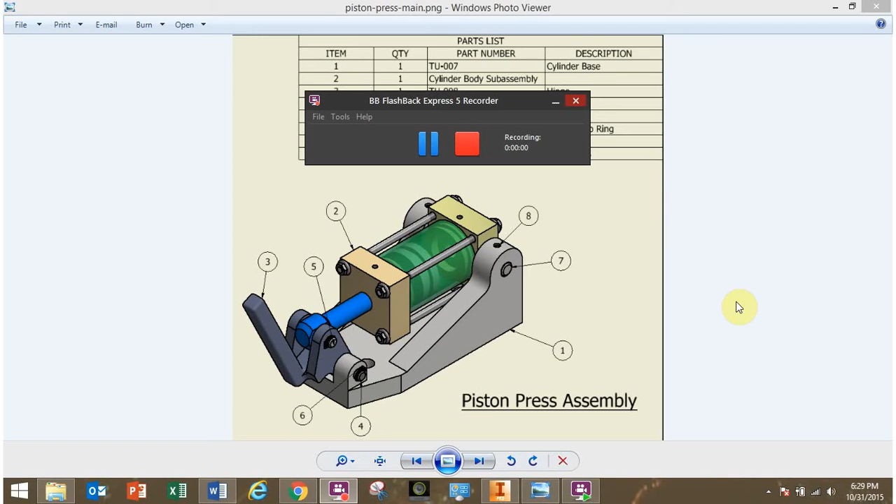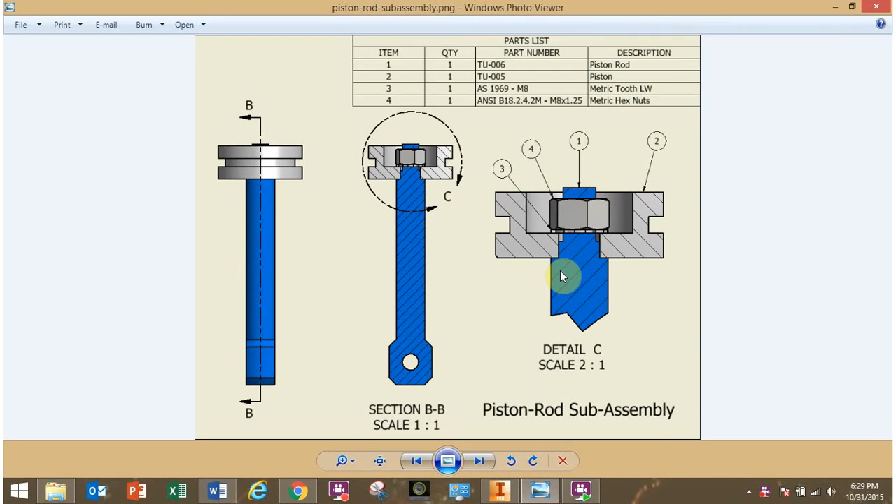So just to review, we've looked at these different drawings and asked which of these sub-assemblies or assemblies do I want to create first. We reasoned that we wanted to start with the lowest assembly that was only made from parts, with no sub-assemblies inside it. We made this one first, and we've also created this sub-assembly as well. Now we have everything we need to make this piston press assembly. Again, this is a bottom-up methodology where you make all the parts or sub-assemblies, and then finally put them all together.

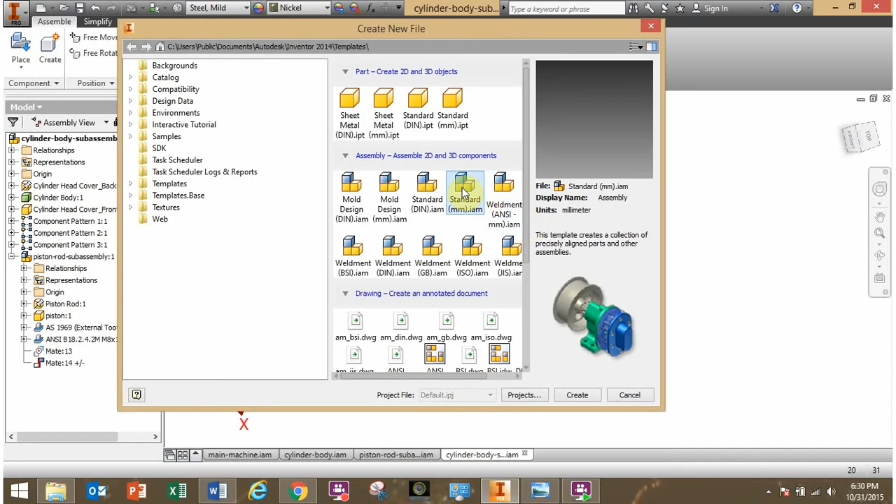Okay, go to File, New, and we're going to make a new assembly. This will be the main final assembly, so I want a standard millimeter assembly. Create that, and let's save it. First thing we'll do, I'll just call this one the main piston press assembly, and hit save there.

So what's the first part that you would want to place? Again, you would want your first part to normally be something that's kind of a base or a grounded part, something that will be fixed, and that's obviously this part here. You have a nice frame that everything else is mounted to. That's called the cylinder base. Let's let that be the first part.

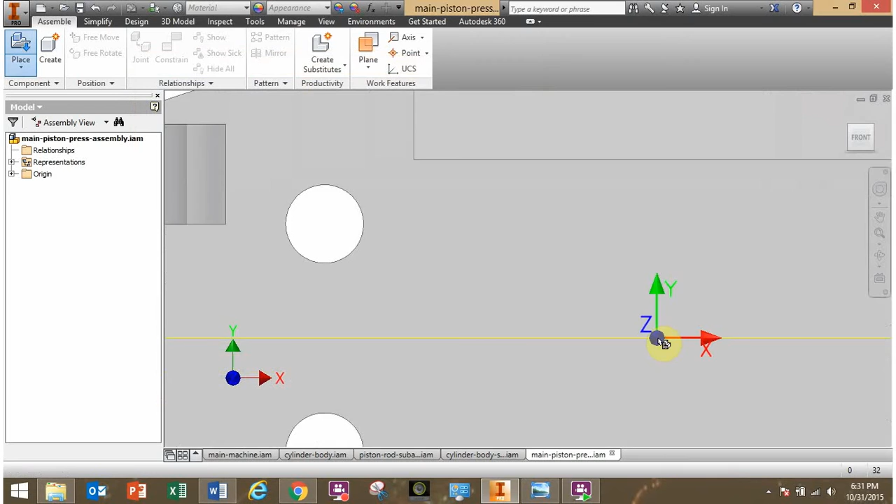So go to Place and find the cylinder base and hit Open. I'll zoom out again. Right click, hit Grounded at Origin. That's always a good idea for the first part, so the origin of the assembly matches the origin of the main part. All right, so we've got that.

Now let's start adding in some other things. So what would be the next part, you think? Well, we have several options here. I could add this handle in right here, number 3, the hinge is what it's called. I could also add this other sub-assembly. Let's actually do that - let's add this cylinder body sub-assembly.

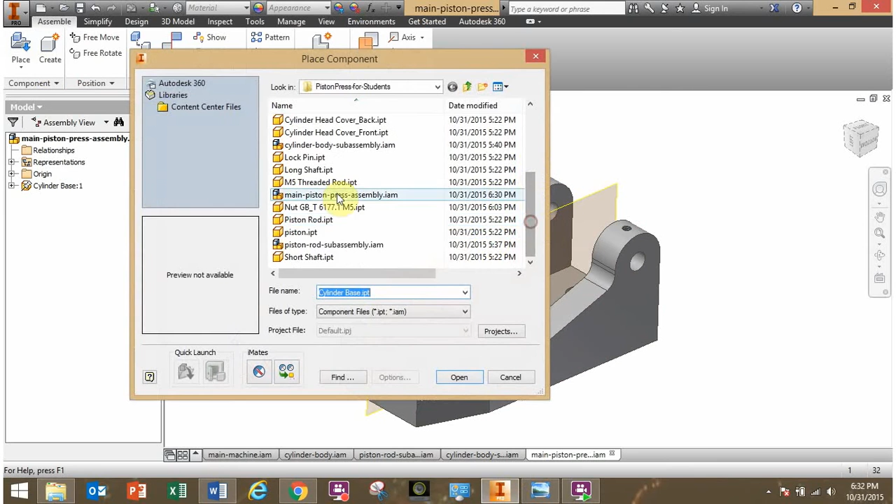Let's go find it. Go to Place, and go to this sub-assembly you've created now, the cylinder body sub-assembly. Hit OK, there it is. Click once and hit Escape. We've got it in here.

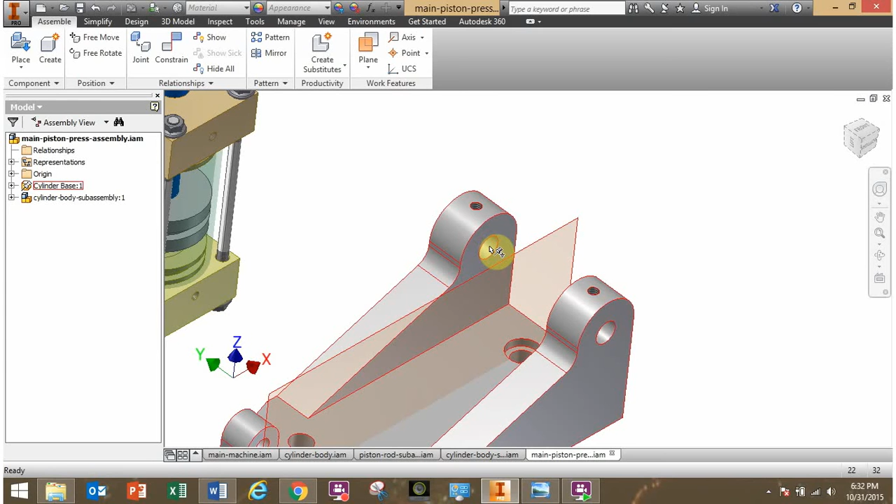So you see these holes here, that hole, and there should be one on the flip side - yeah, this hole here. Those will align with these holes right here. Alright, so let's go to constrain. Let's make sure that axis fits with this axis. Hit OK, there it is.

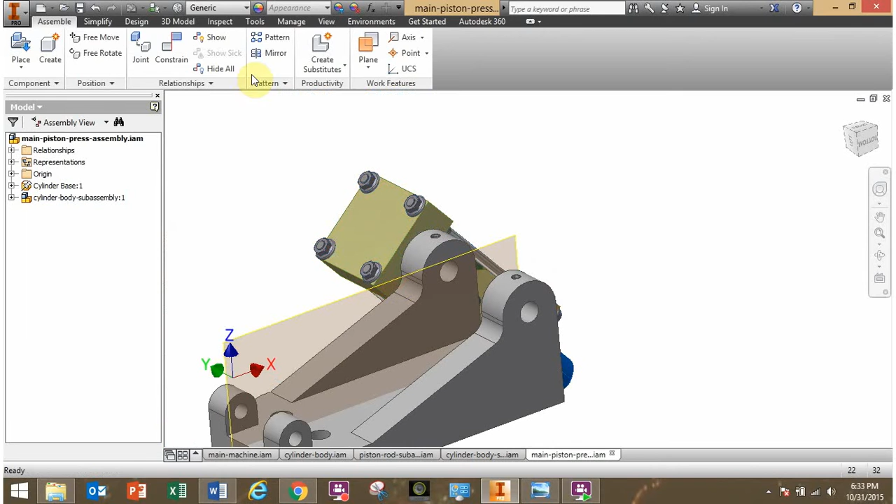Now, again, let's refresh on the degrees of freedom. Let's go back here to View, select degrees of freedom, and you can see there's 2 degrees of freedom. There's one green arrow and one green rotation vector. That means I can rotate it and I can slide it in and out - those are the 2 degrees of freedom.

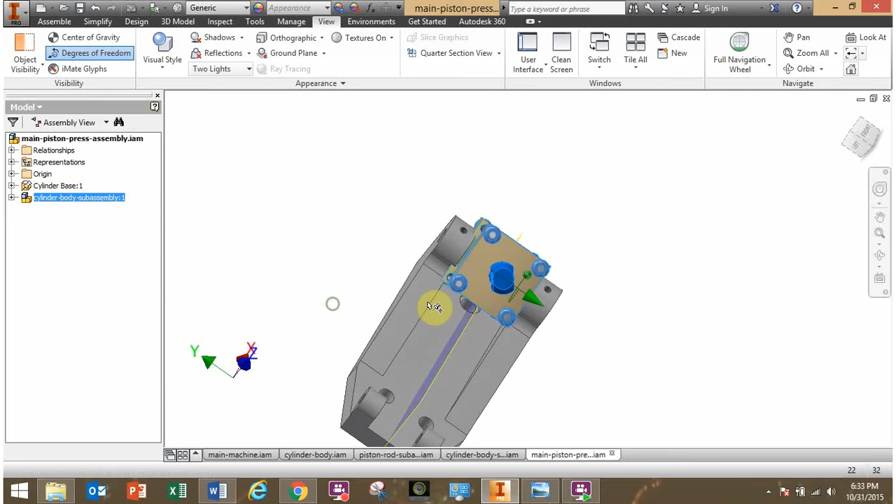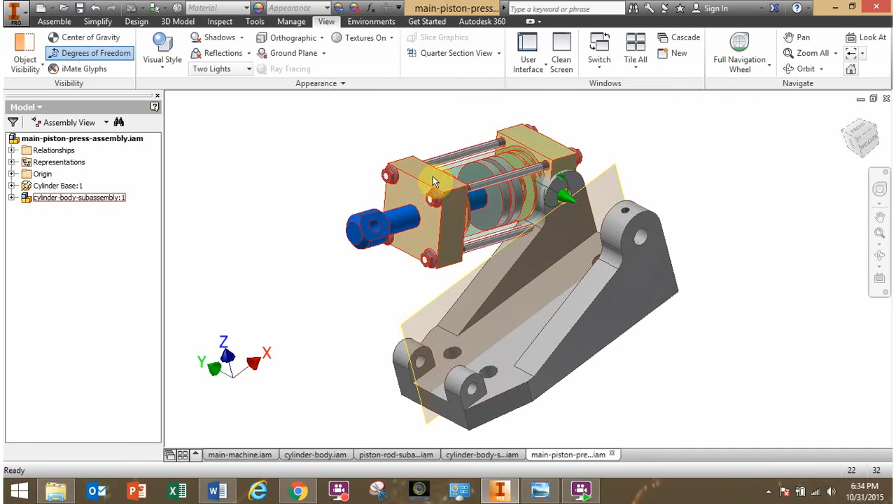Well, how about restricting this so it can't move left or right? How far, or where do I want to restrict it? Well, I want it to be right in the middle. Again, you remember how we do that? That's with planes now - I don't want to do it with a face, I want to find a mid-plane. This mid-plane should already be turned on for you. So I want to constrain this mid-plane right here with a mid-plane on this sub-assembly.

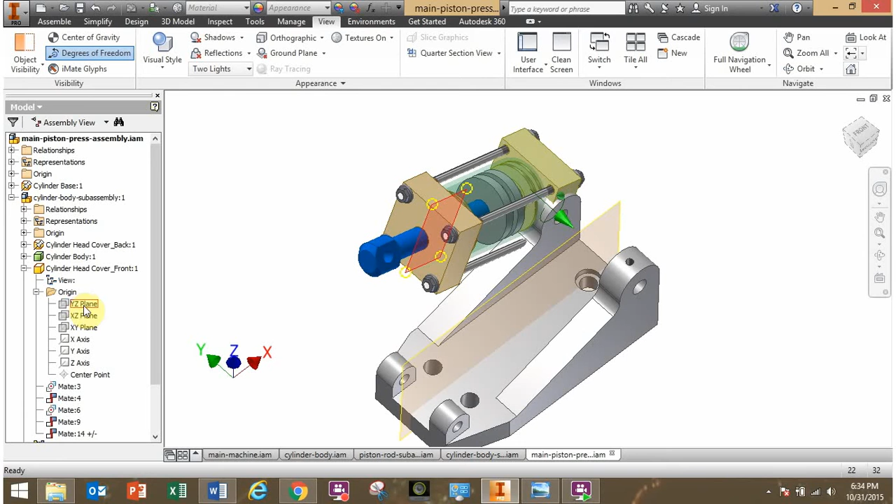All right, so let's find a mid-plane on this sub-assembly. Expand that, and I'm going to look at one of these front covers, either the front cover or the back cover. Let's look at this front cover - expand under the origin. You see that plane right there? Not this one, not this one - select the YZ plane. I want to constrain, I'll just turn it visible. I want that plane to match up with the middle plane of the cylinder base that I've put in.

All right, so go back to constrain. Now notice one thing before I add this constraint - you see this green arrow right here for the degrees of freedom.

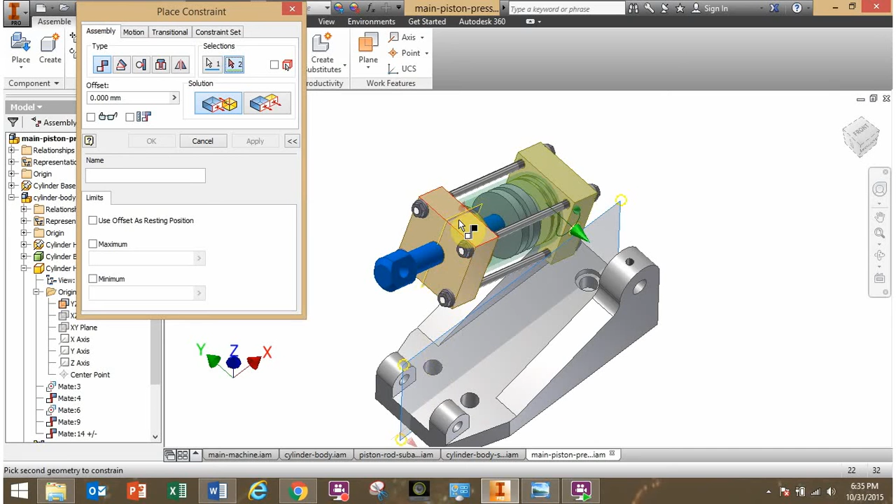That says it's free to move left to right like this. After this constraint, that green arrow will go away, and it will only be able to rotate. So I want to constrain this plane, select that plane with this plane. Hit OK. Now notice what happened to the degrees of freedom. It's a red rotation vector there. The green translation vector went away. So the only thing I can do now is rotate this.

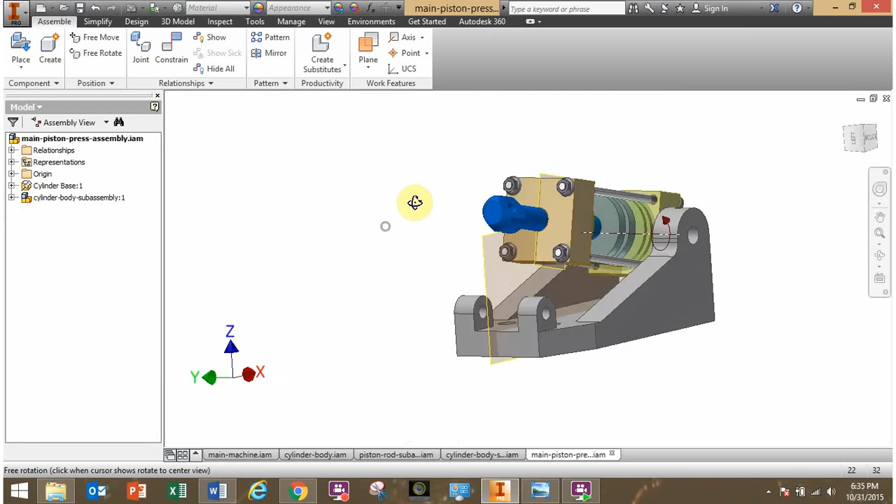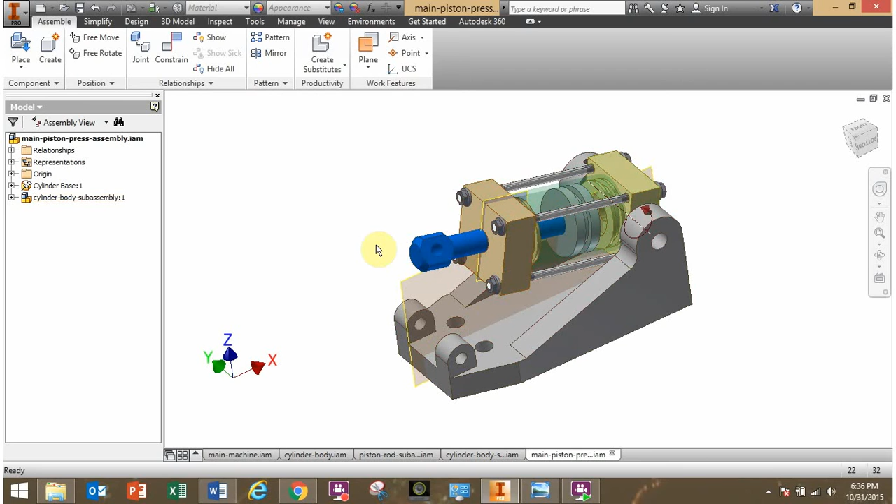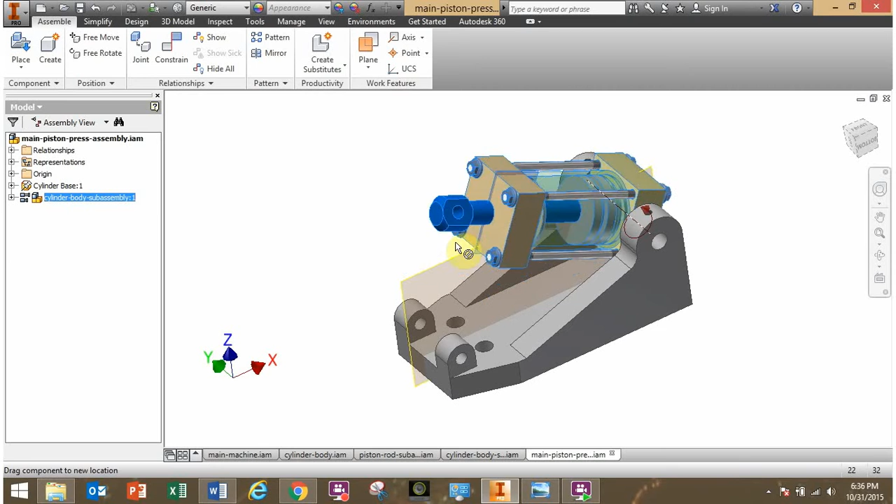Now, before you move any further, I want to show another thing here. Notice if I try to click on the piston rod and move it, you can't do it. But you do want it to move. I want this piston rod to move in and out. By default, when you place a subassembly within an assembly, it locks that subassembly, and we don't want that. So if I right-click on the subassembly for the cylinder body, come down here to flexible. When I click on flexible, you see these little icons pop up on it now. This allows the piston rod to drag in and out, just like I've already previously constrained it when I made that subassembly. So again, I'd make that flexible.

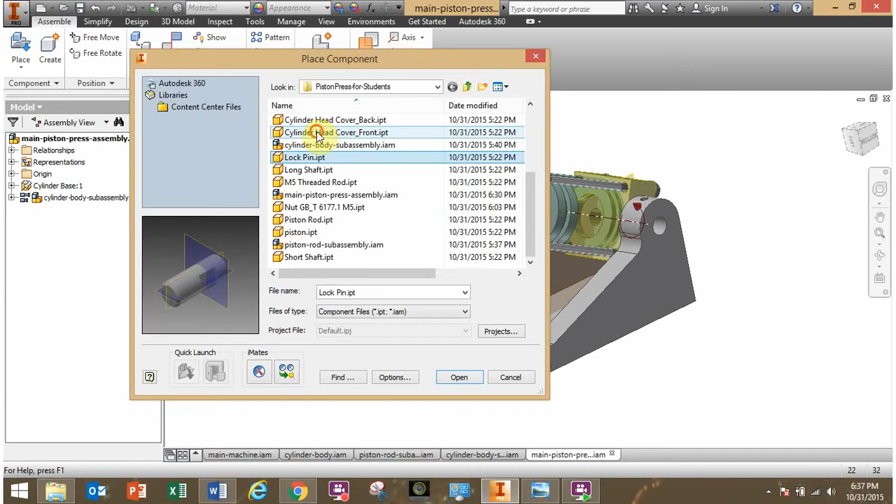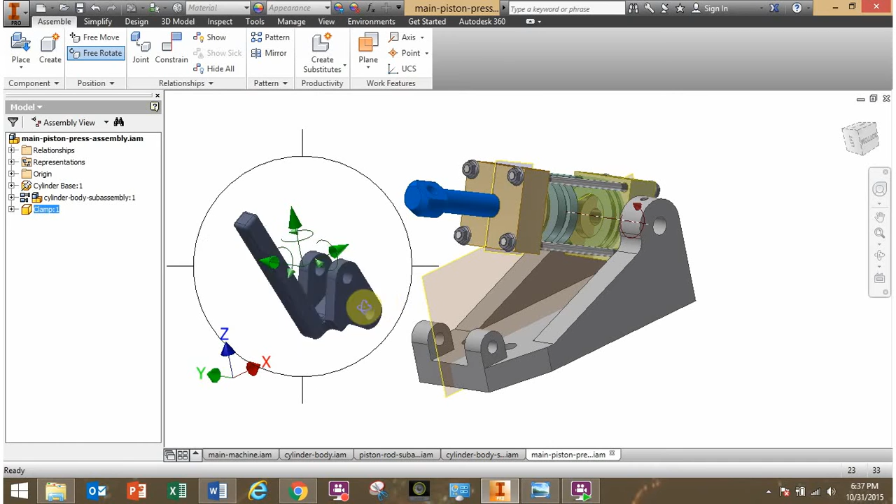Notice the degrees of freedom. I'm able to move it any way that I want. Again, I will click on the rotate, and let's rotate this to approximately the position that I'll place it. Now I'm going to add a constraint, and let's make this fit in here. Click OK. Notice most of the degrees of freedom went away except for two. Now I can slide it and rotate it like this.

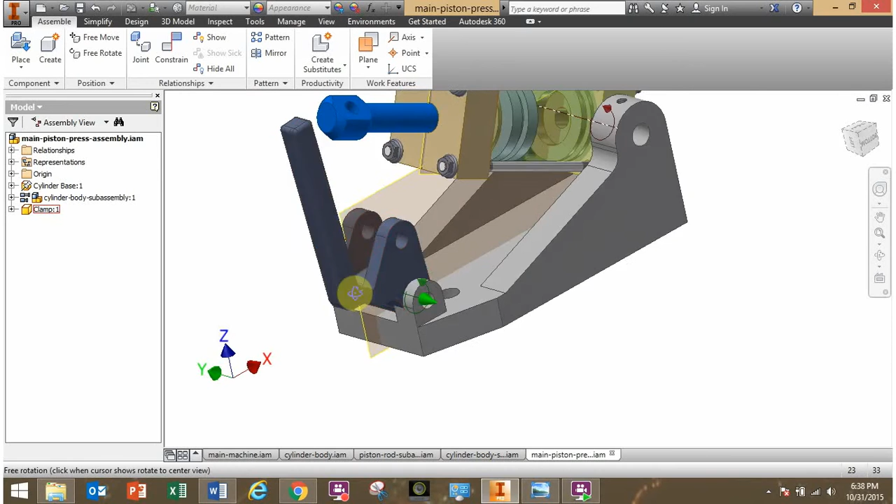Now what's another logical constraint? Well, I could say, hey, let's make this thing be in the very middle, which is true, but if I constrain it to fit with this, I may not have to do that. Let's look at that. Let's add a next constraint, and let's say I want that axis to be centered with this axis now. Hit OK. So now those are constrained. I can still slide it left or right though. So again, how do we fix this?

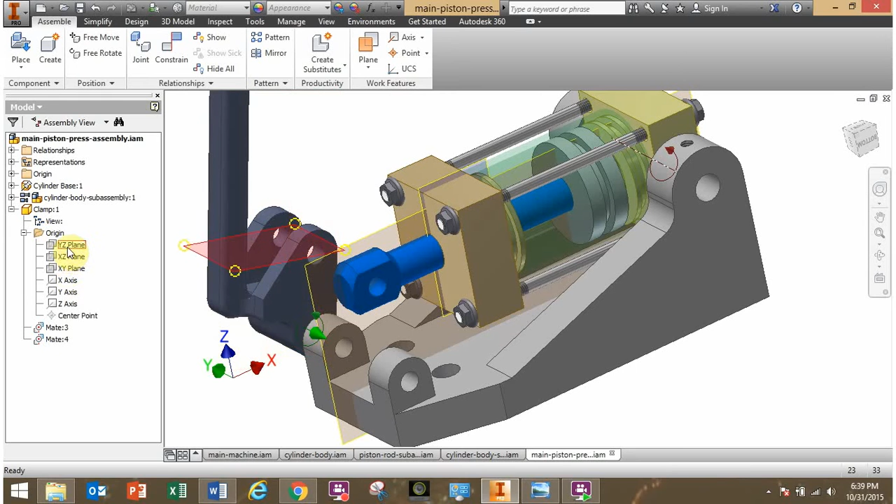Well, let's go find a middle plane of this handle. It's called the clamp here. So expand the clamp, let's look under the origin. Not that one, not that one. There's one, let's make that visible. Notice it goes right through the middle there. I can click on constrain, click on this plane, and then the center plane for the base here, click on that. Well, look what happened.

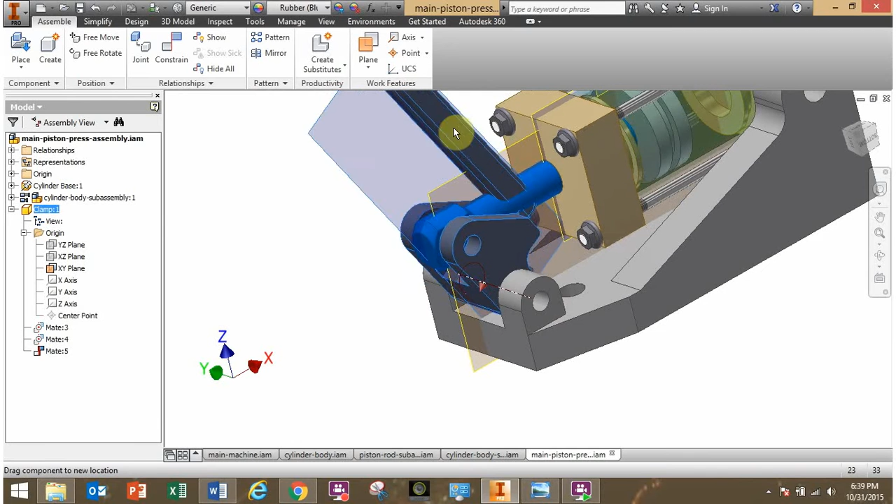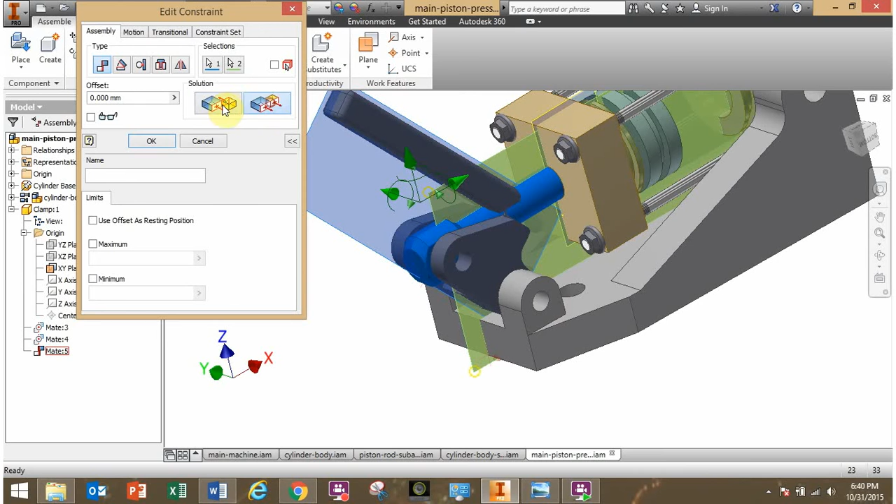It actually flipped it around the wrong direction. Why did it do that? Well, let's go back to this mate, the last constraint that I just added. I'm going to right-click and edit that. Now, you see under solution here, there's in this picture two red arrows, which are normal vectors to the faces or the planes. They're opposing each other, they're opposite. In this one, they're the same direction. So depending on clicking this, it will flip the two planes. So if I click on that one...

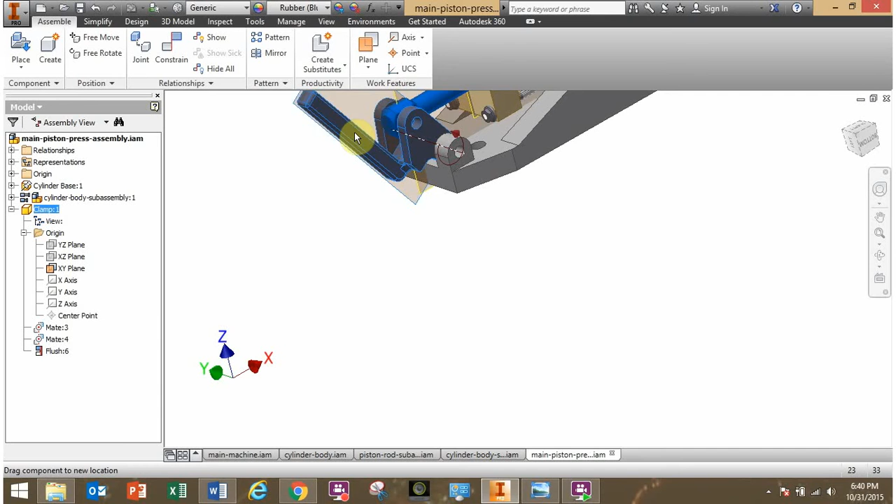Now let's rotate it back up here. There we go, sorry, trying to get the rotation going. Rotate it up, having a hard time. There it is, sorry, I was having a hard time rotating it. Okay, now when I flip the orientation, it actually flipped it in the correct location now. Let's see that again. Again, I can right-click on this constraint, the last one I added between those two planes. Right-click, hit edit that.

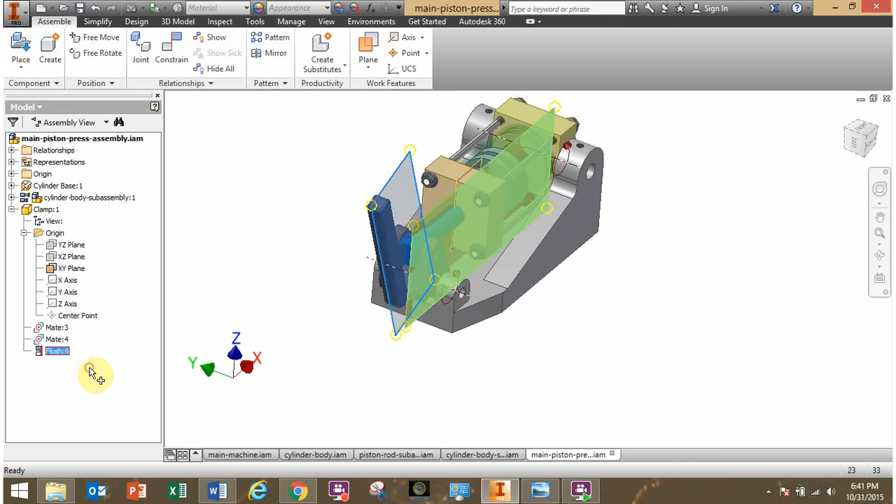So if the solution is this one, I click OK, it flips it around. Okay, that's not what I want to do. Let's edit that. Let's just flip it back to the flush. Okay. There we go. All right.

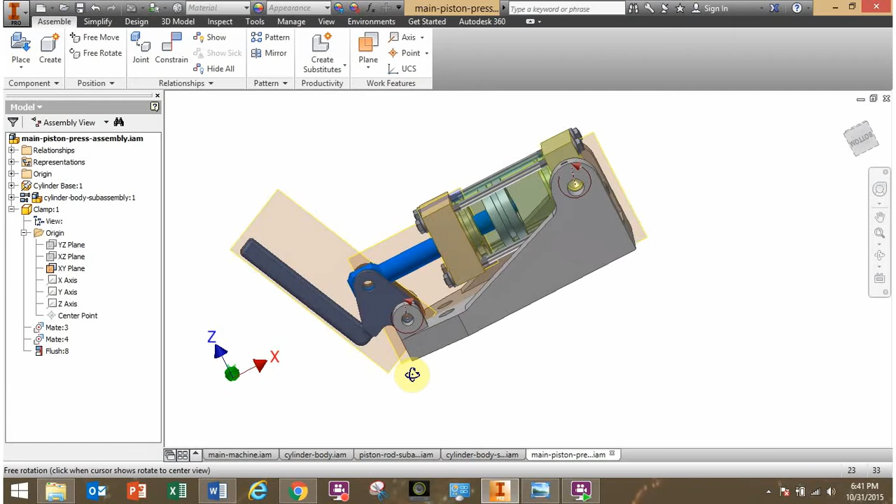So you can see we've already got the motion constraint here, and notice I can't move it further than this or further this way because of the limit that I applied when I made the limit for this cylinder on the cylinder body subassembly here.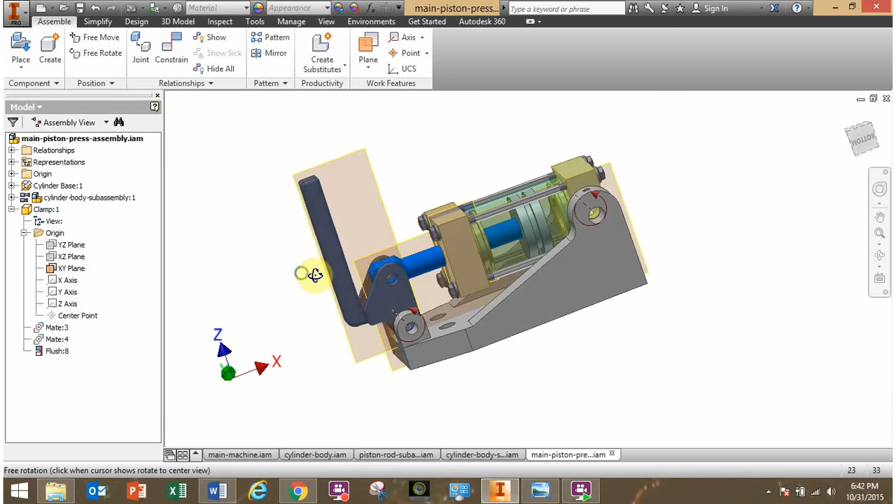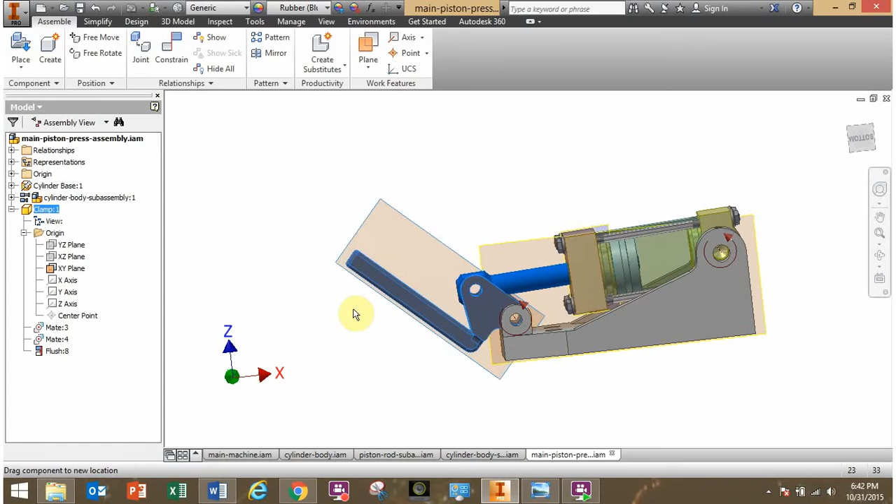That's very nice. Now, let's say if I only wanted the stroke to go between here or here. This may be important for you to know how to do on a quiz, to know how to limit an angle constraint. So if I wanted to add limits to say, let's make this handle only go from this position to this position here. Let's say one that's vertical to 30 degrees from vertical, so I only want the handle to limit to this type of motion here. I don't want it to go here or here, just a small limit. So that's adding a limit to an angle constraint.

All right, I'm going to turn this plane off, turn the visibility off. So that would be adding a constraint. Now, what type of a constraint? Every constraint that we've added now has been a normal mate constraint here. You can see these different types, all right.

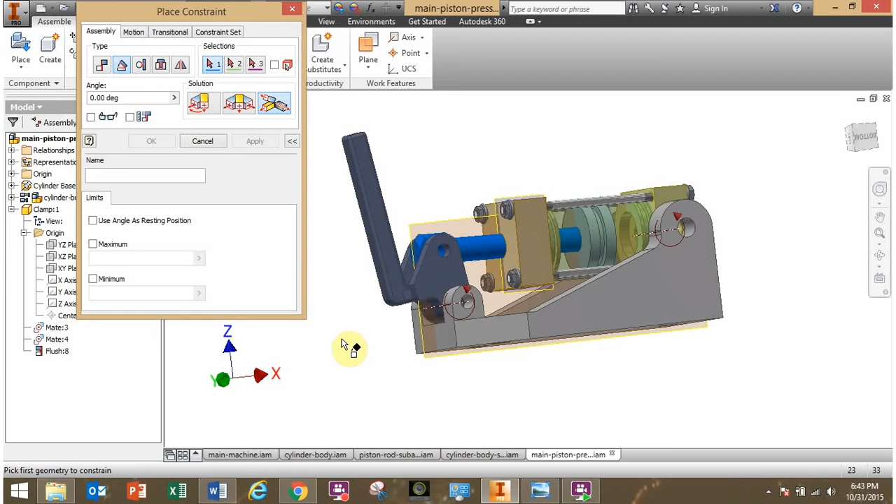This time I'm going to actually add an angle constraint here. So select on angle, and by default it selects this third one here, it's an explicit reference vector. So the first one, I'm going to say I want this face here, I'm going to define an angle between that face and, let's say, this flat face here.

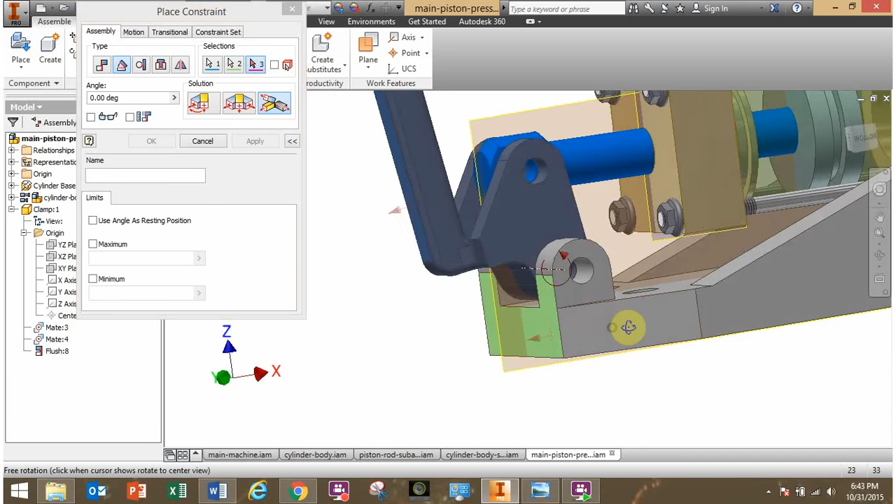Now the reference vector, which is this black one, that one should be perpendicular to both of those. So that needs to be going this way on this, but no, sorry, that face is angled. How about this face? That face right there, the one that's now turned purple, the normal vector to that face is perpendicular to both this vector and this vector here as well. So I could add some degree here.

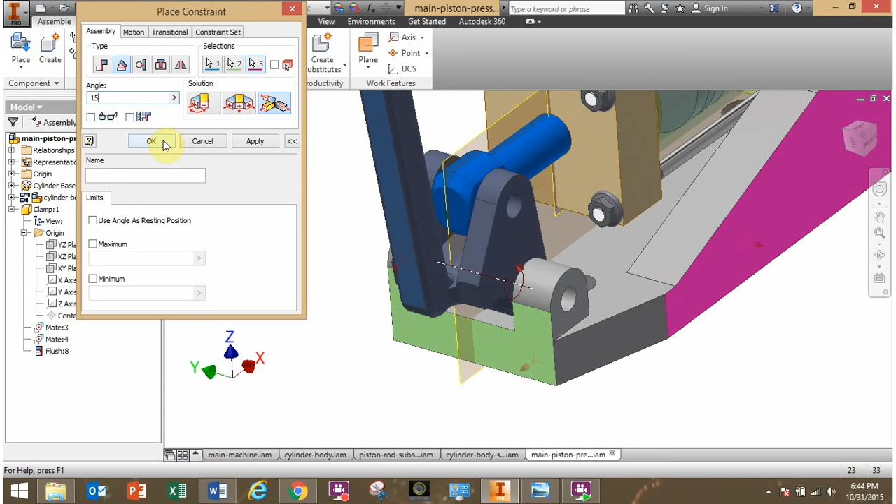If I made it 0, what if I made it 15? Is it going to give me a preview? I hope it would. Let's say if I make it 15, what does it do? Now I'm going to edit that. Let's make it about 0 degrees. Yeah, it makes that vertical now.

What if I make it, I can go back the other way, let's say make it -30, and it just goes this way, -30 degrees. I can continue this process, maybe -45, maybe make it 20, it goes back the other way. So I'm adding these angle constraints, okay.

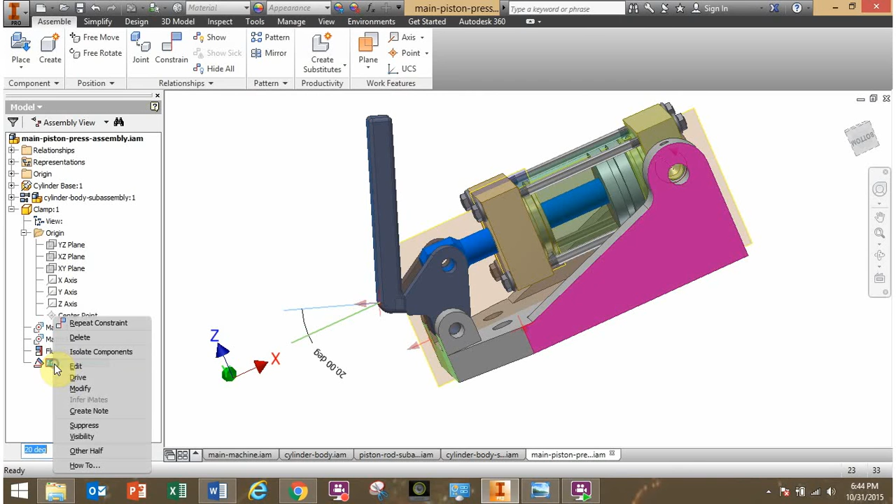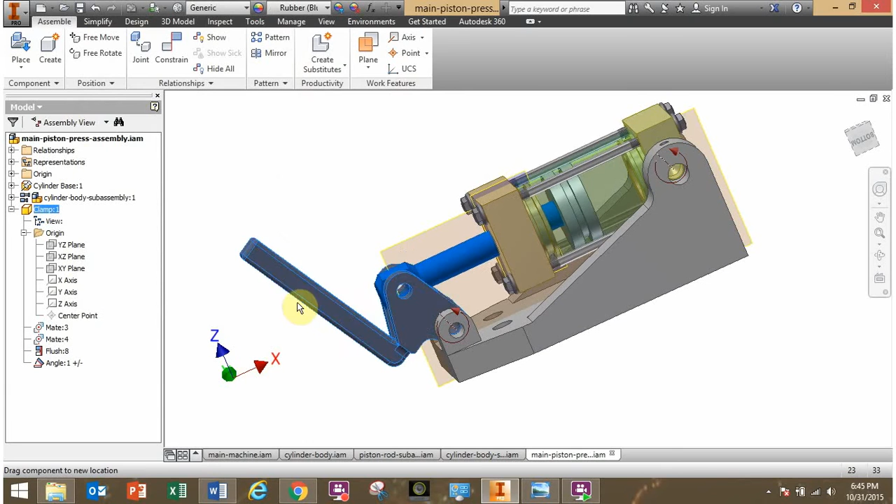But with this, I actually want to add limits to that. So let's right click on that and click on edit. Again, I want to use limits. The minimum here, make that -30, and the maximum, let's make it 0. And now I hit OK. You can see I've added, now if you click and try to drag this, I can't move it any further than 0 degrees, and I can't move it any further in this way than -30 degrees. So I've applied limits to this angle constraint here.

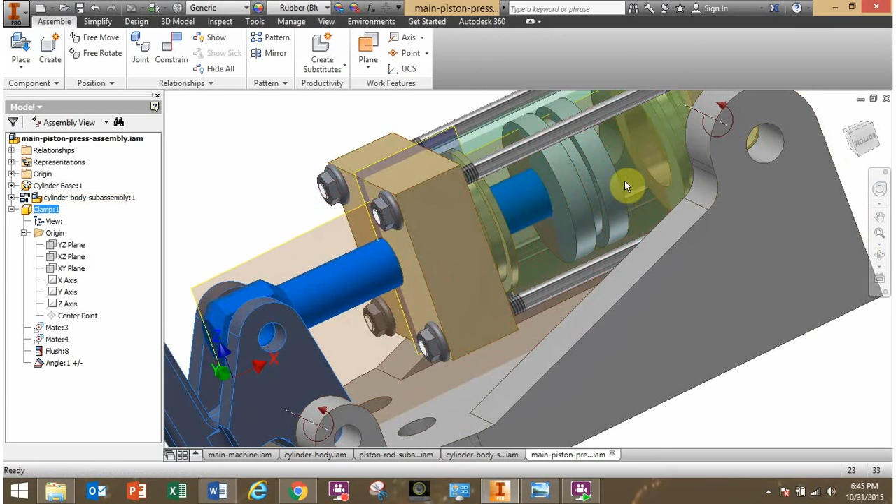Notice now this limit on the angle constraint prevents this piston from actually contacting, or it prevents the piston from going to its maximum or minimum position. That may be important for you to know how to do on a quiz there.

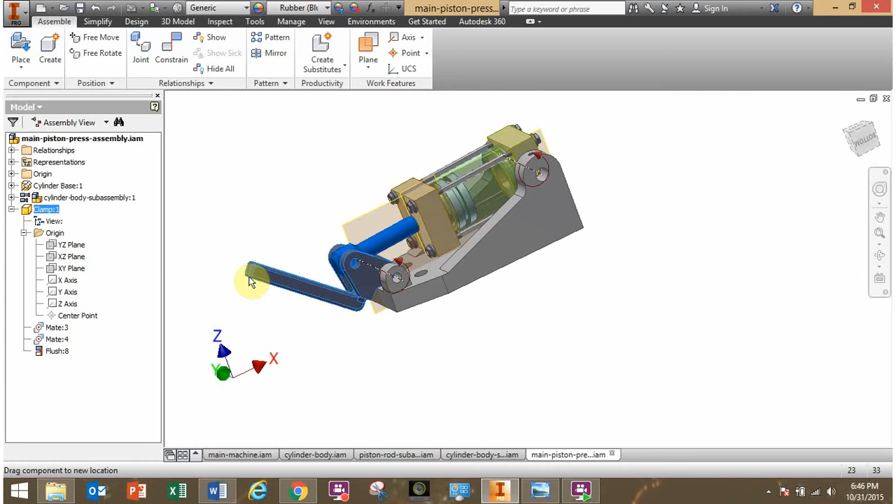I'm actually going to delete that angle constraint now. So now the constraint is again limited by the motion of the piston where it contacts here and here.

All right, so what else do we need to do? Let's go look here. Yeah, the last thing we need to do is, we've got the subassembly, we've got the main base, I've got this clamp or that handle, let's say. The last thing is just to add these pins, which would actually hold everything together in reality. That's not too bad to do. I'll just go through that very quickly now.

All right, let's first add, this may be the most complex one, these short pins here. Number 7, that's a lock pin. Okay, so let's go get one of those.

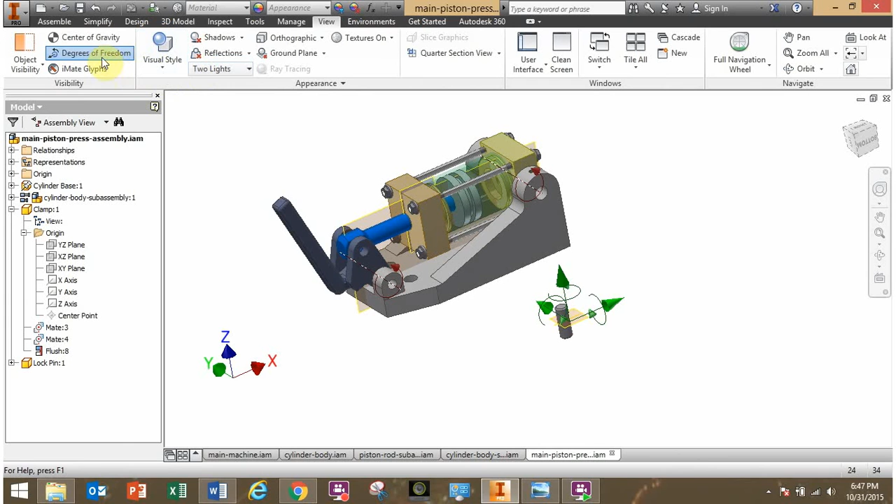Let's go to Place and find a lock pin. There it is, hit OK. Place one. I'm going to turn off the degrees of freedom so it's not looking at so much.

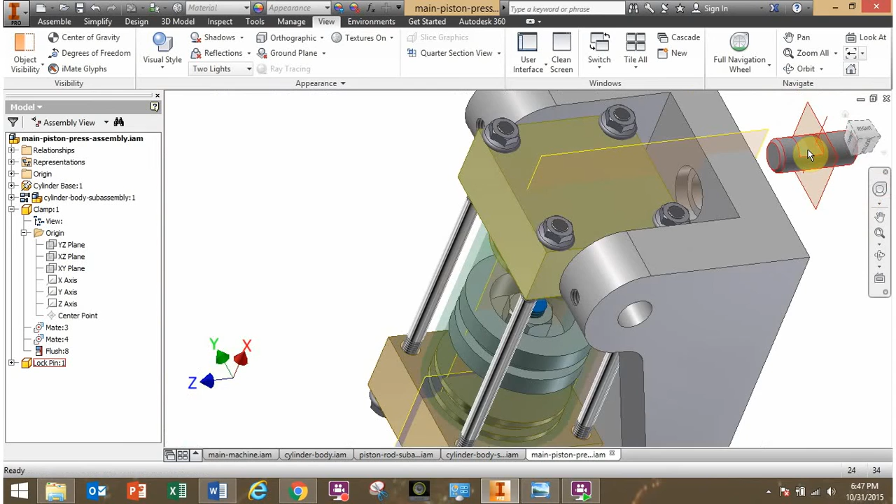Now I want this pin. Let's zoom in and look at it here. You can see there's a flat piece right here on this pin. The purpose of that is so I can put a screw through this hole that will screw down on that flat piece and keep that pin from sliding out of this hole.

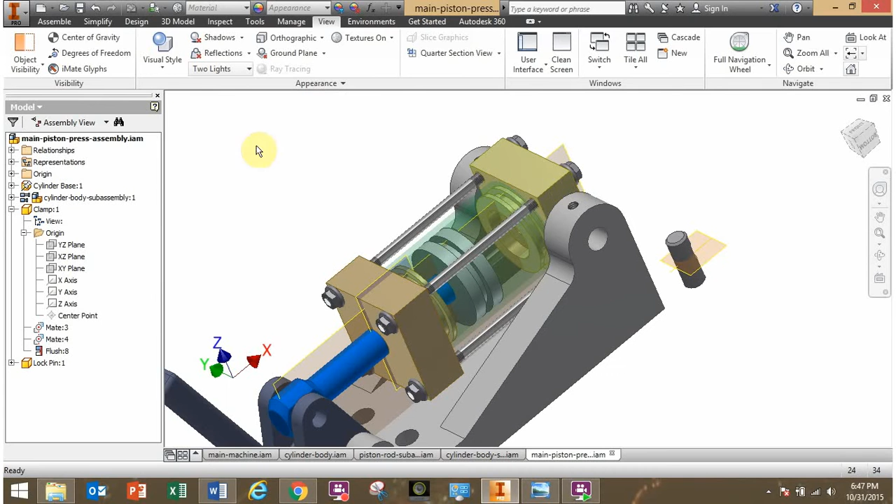Let's look back at our picture. Look at part number 8 here, the 6mm SHCS. That's actually a little lock screw. Let's go find that. Go to Assemble, hit Place. Here's the 6mm SHCS. Hit OK, place that.

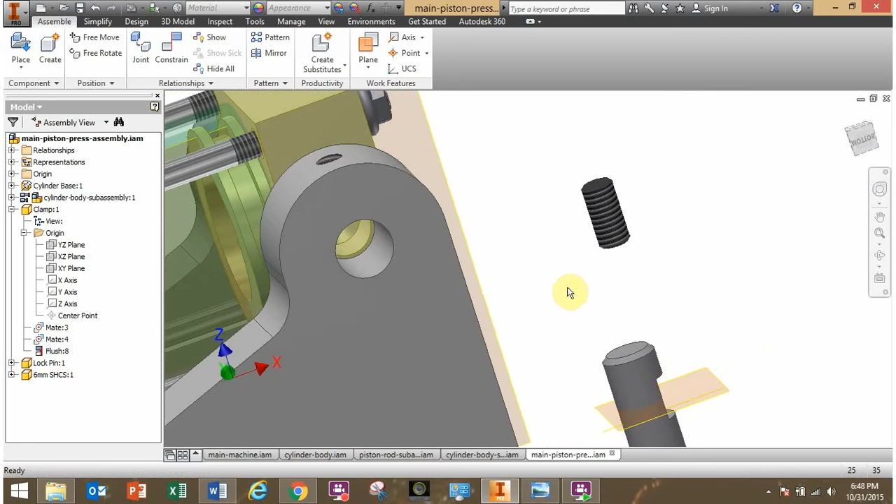Now let's look at this part that I placed. One end is flat. The other end, rotate around, has a little hexagon hole in it right there. That's where you would put the little Allen key or wrench to actually screw it in.

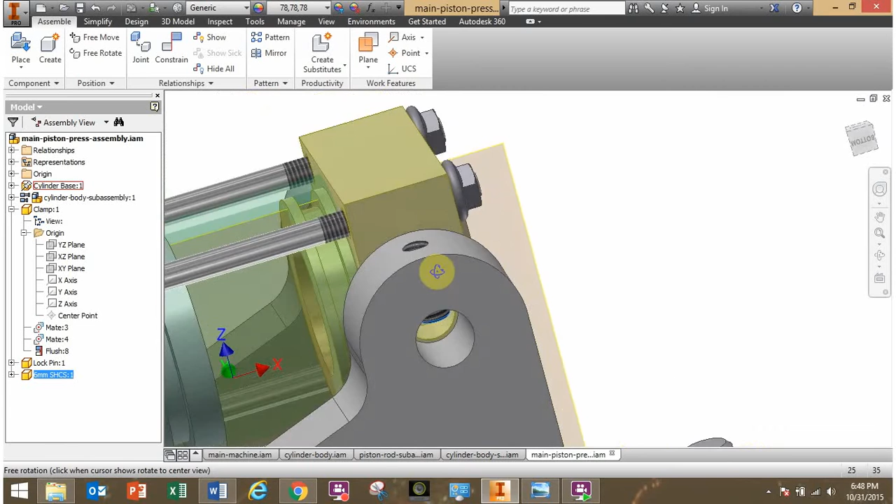I'll click on Free Rotate and rotate this where it's in its approximate position, click on Constrain, and make this axis centered with that axis, hit OK. So now this will screw in here. If I slide it down, you can see it comes into that hole. The ends of this screw would fit flat up against this and would lock that in place.

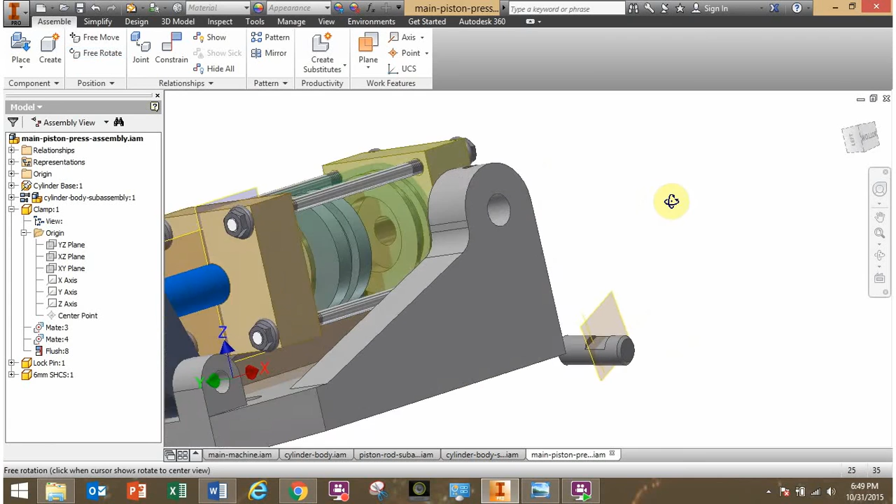Again, let's click on Free Rotate and rotate this component to where it's approximately in the right position. There you go. Now let's constrain this axis with this one, hit OK. So this slides in and out like this.

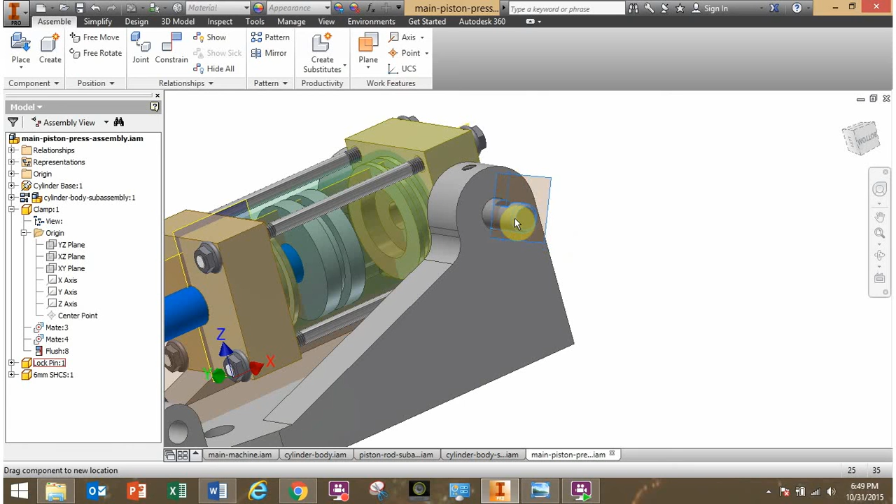Now the question is, how far? Well, to make this easier to see, when I slide this inside it's hard to see what's going on because I just look at this cylinder base, and I kind of want that cylinder base to go away. So let's right click on the cylinder base. If I uncheck the enabled, it'll just make it transparent so you can really see what's going on inside.

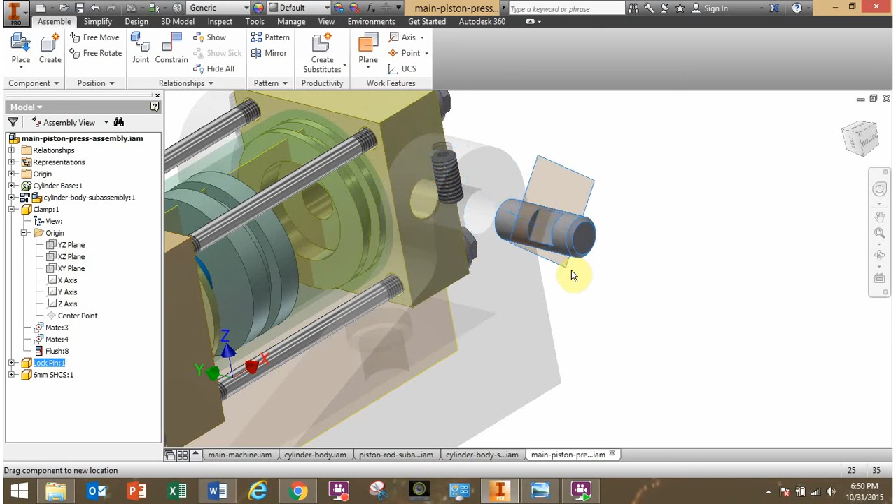Notice if we look at this pin, it has a plane that goes through the very middle of the flat surface of it. So I want to use this plane to constrain to a middle plane on this screw, on that 6mm screw.

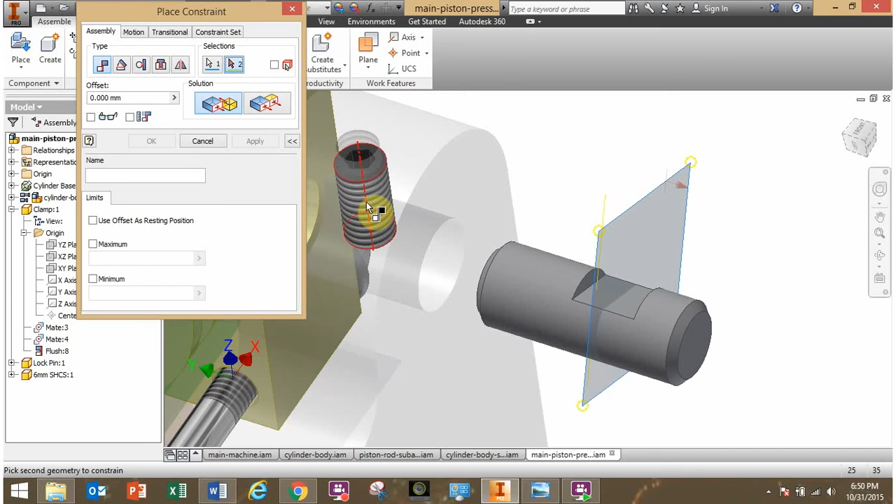Now let's go to constrain, and I'll constrain this plane with a plane on that screw. I could actually do that axis like that as well. Let's click on that axis, hit OK. You see what it did there? It made the axis of that screw always on this plane, so now I can't slide this lock pin left or right anymore, I can only rotate it.

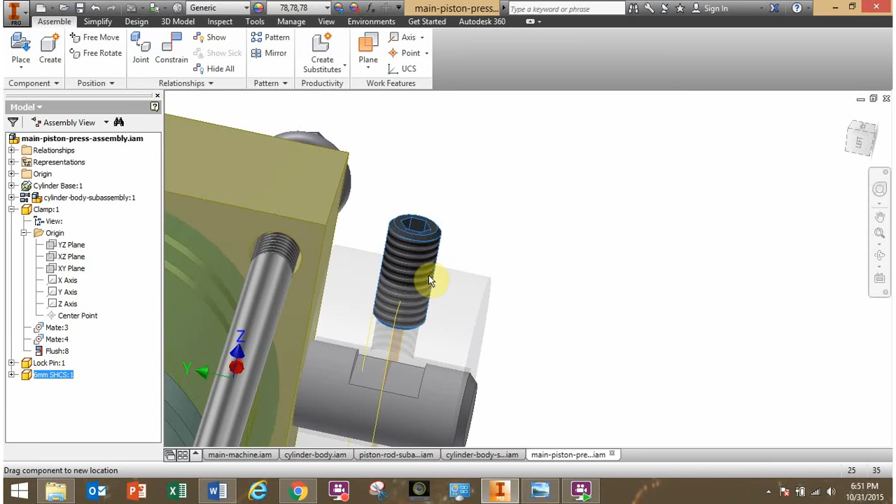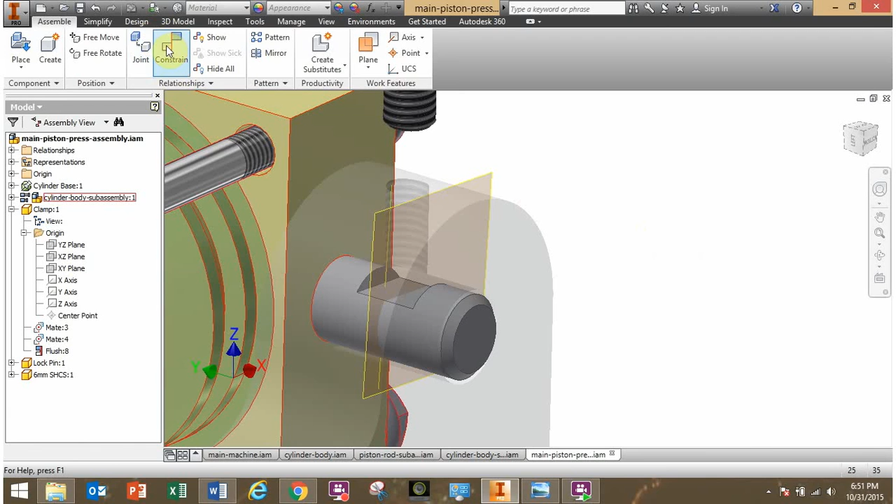Now I can still pull this up or down, but where should this be locked? Well, this face should match with that face, and when I do that, it will prevent the rotation of this lock pin. I'm only adding as many constraints as necessary, and they're logical constraints, very logical. So let's go to constrain, and constrain this face with this face there, hit OK.

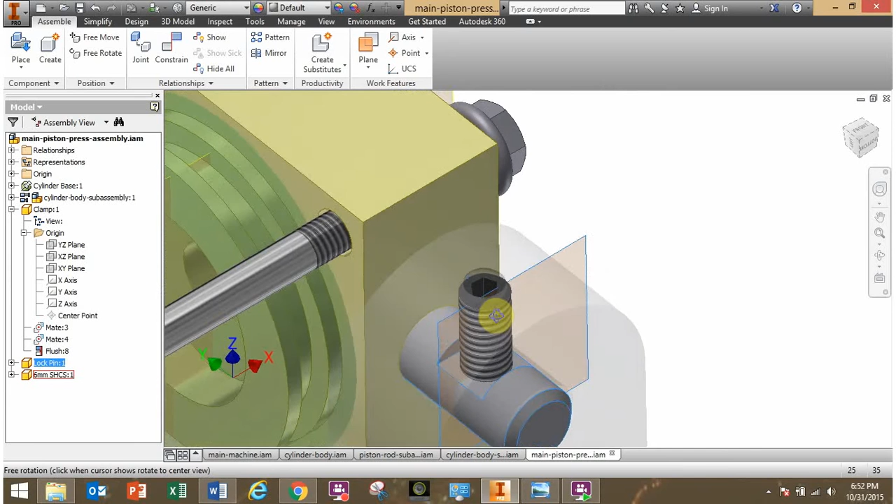There it is. Now if I try to click and rotate this pin, I can't do it, because the screw is fixed to be inside the hole in the cylinder base. Notice the cylinder base in the part browser is green because I've turned off enabled so I can see through it. Very nice to do. Again, disabling something allows you to see through it and make selections that are easy.

Let's go to this mate here. I want to show you one thing about a mate to make it very clear. We've discussed it in the last video, but let's make it clear. This is the last mate where these two faces, the bottom face of the screw and the face of that pin, the flat face on the pin, were mated together. Right click and hit edit on that.

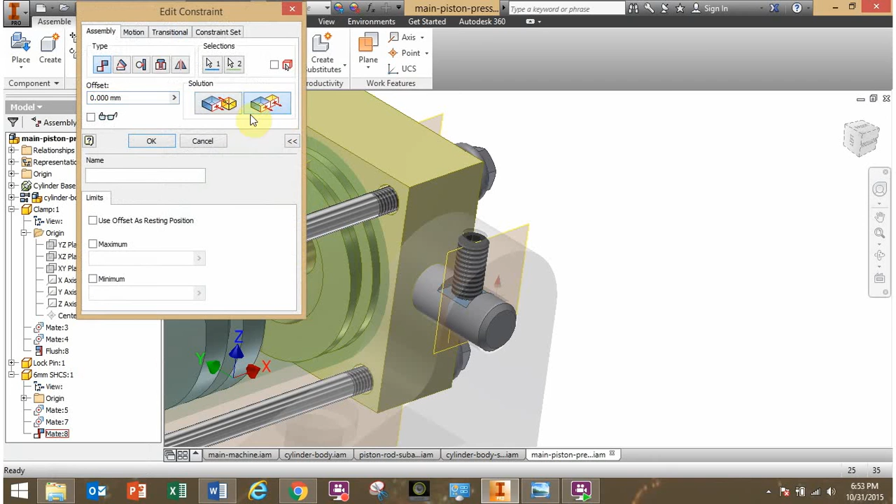If I change the solution type, let's change it to flush here, click OK, you see what it does is it flips that pin around. So click on that flush, hit edit, change the solution type this way, and you can see it flips it around. That's just showing you what that solution type does.

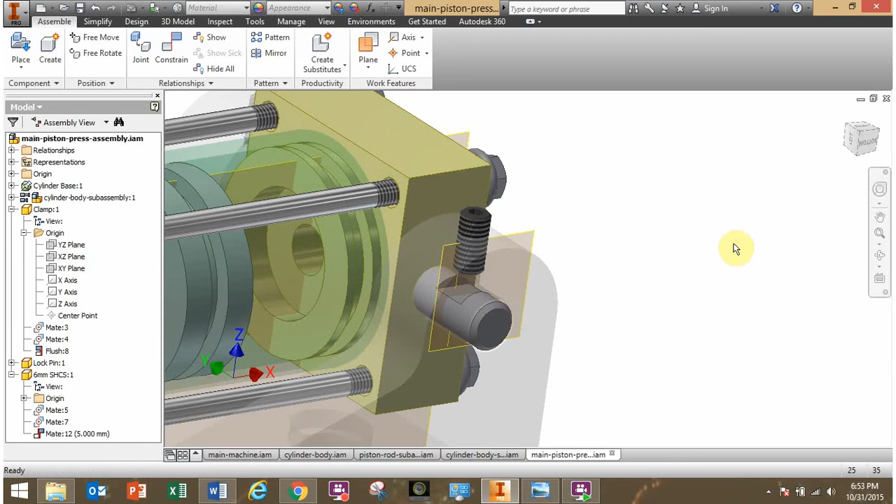So let's change it back to the correct one. Now, you could also click on that and select an offset. Let's say you want an offset of 5 millimeters. Click OK. It actually offsets those two planes 5 millimeters from each other. But I just click on it once since we want those to be actually stuck together there.

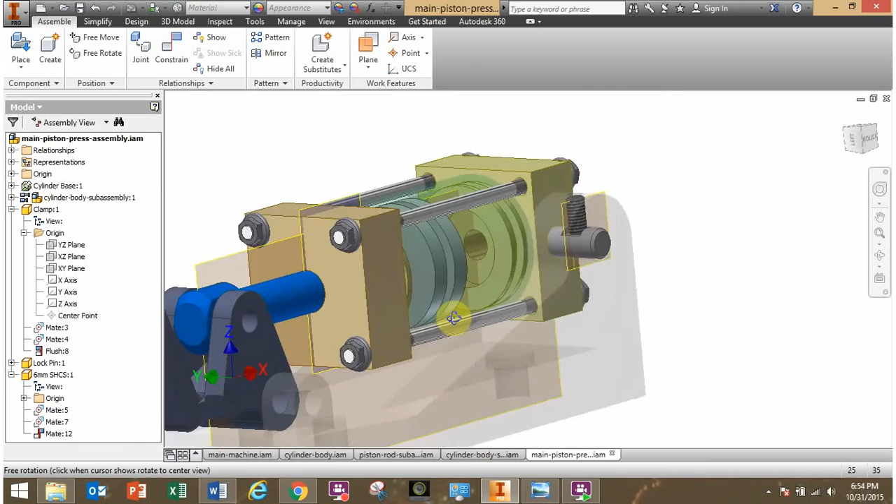Now I'm going to do the exact same thing on the other side over here. Let's do that very quickly again. I won't discuss this one since we just discussed it, so I'll just do the same thing.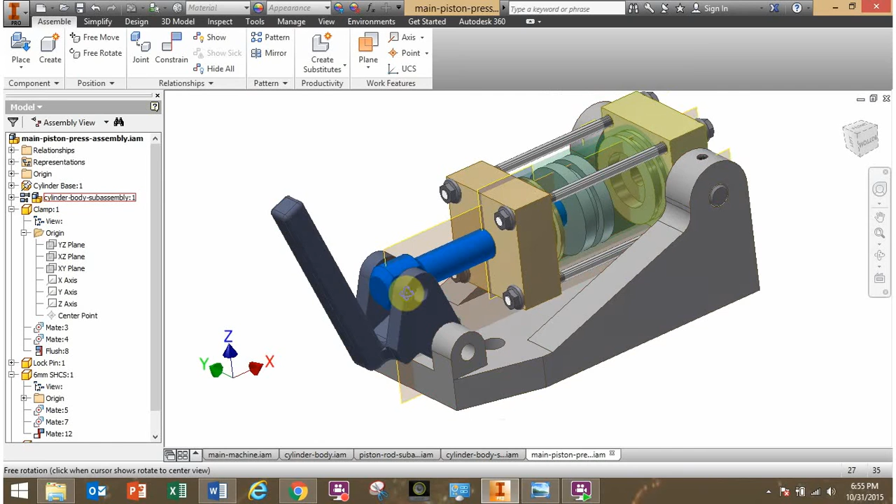All right, so we've got that. Now let's go put these pins in here. Let's first find the name of the pins. Look at number 5, and number 5 is a short pin, that's what it's called there.

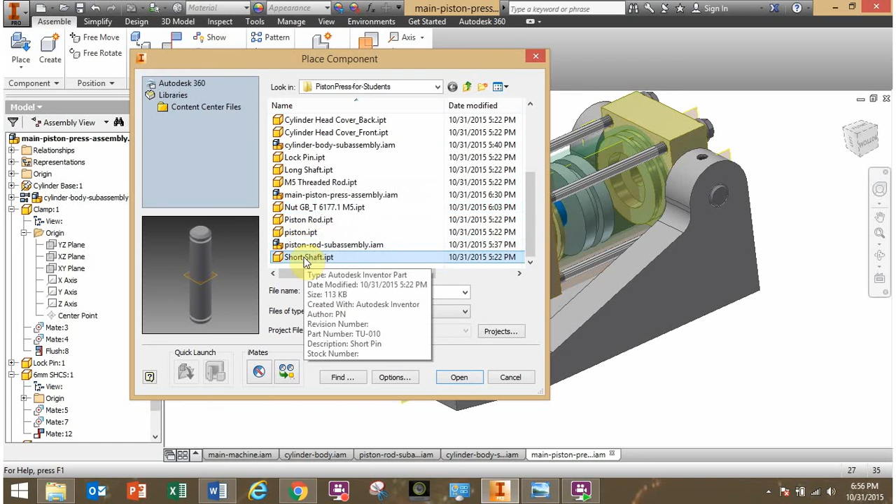Let's come over here, place, go find your short pin. Long pin, maybe it's called a short shaft there. That looks about right. Yep, very good, the short shaft. So I want the center of that shaft to be in the center of this hole.

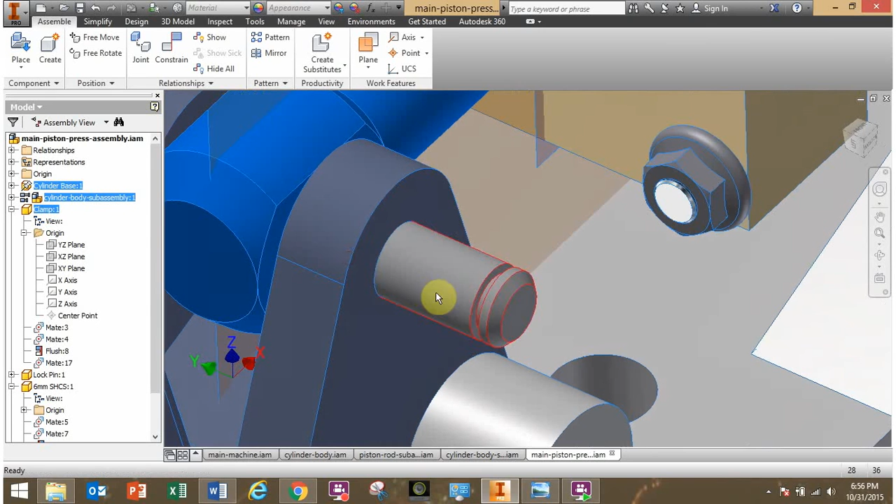Hit OK. Now notice this shaft has this groove in it right here. So what's going to go in that groove is a little spring, a little lock washer, let's say, to prevent it from sliding here, sliding like that.

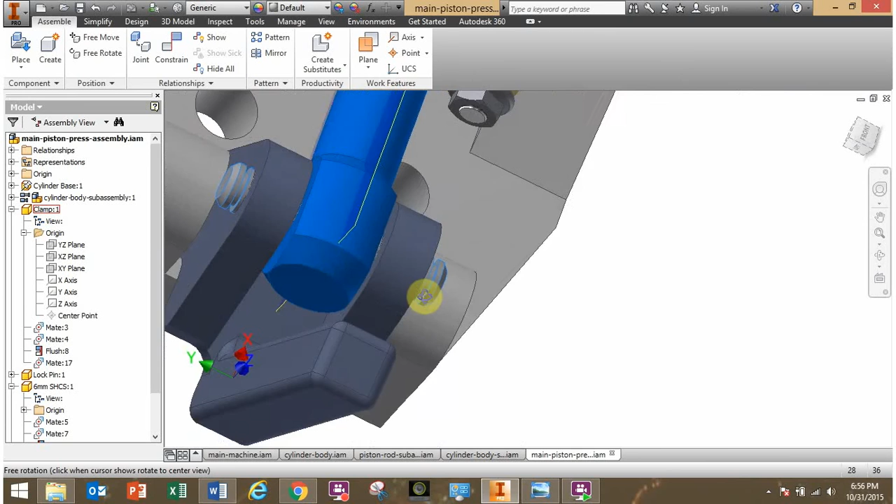Now again, I've constrained it to be along this axis, but I want the middle plane to always be in the very middle, so it's the same distance on either side. So again, we'll do that as we've done previously, by constraining mid-planes of parts. So constrain that mid-plane with this one, hit OK.

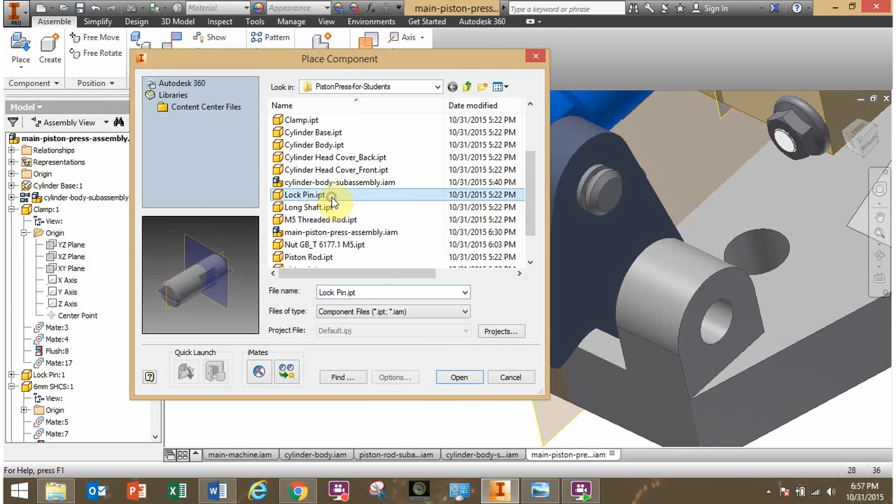All right, I can do the same thing with the long shaft. Let's look here, part number 4. Part number 4 is the long pin there. So let's come here, let's place, but not the lock pin, the long shaft there. Now hit open.

All right, again, let's constrain the center to be on this center. Slide it out so I can see this middle plane. Let's constrain that middle plane with the middle plane of the base. Hit OK. And we're very near the end, guys.

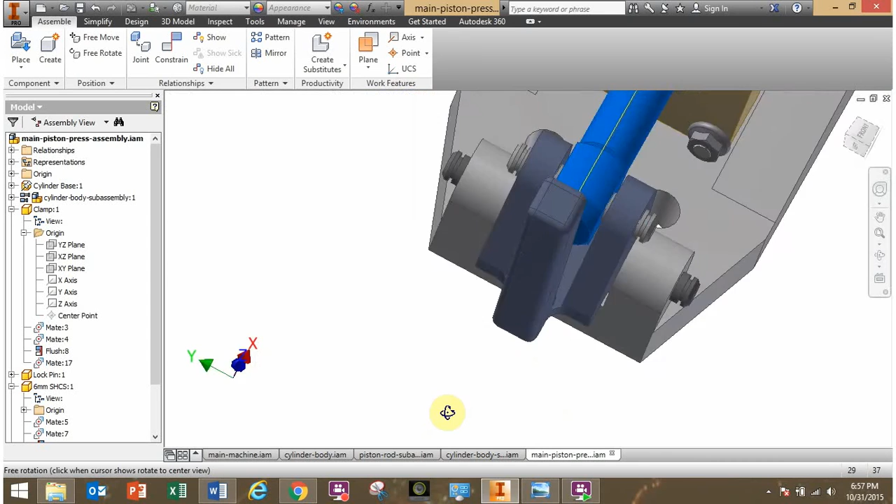Almost done there. Now we just need to put the little lock washers into the slots there. What are they called? Number 6, the snap ring. Sorry, I called them the wrong thing. They're called a snap ring there, the metric snap ring.

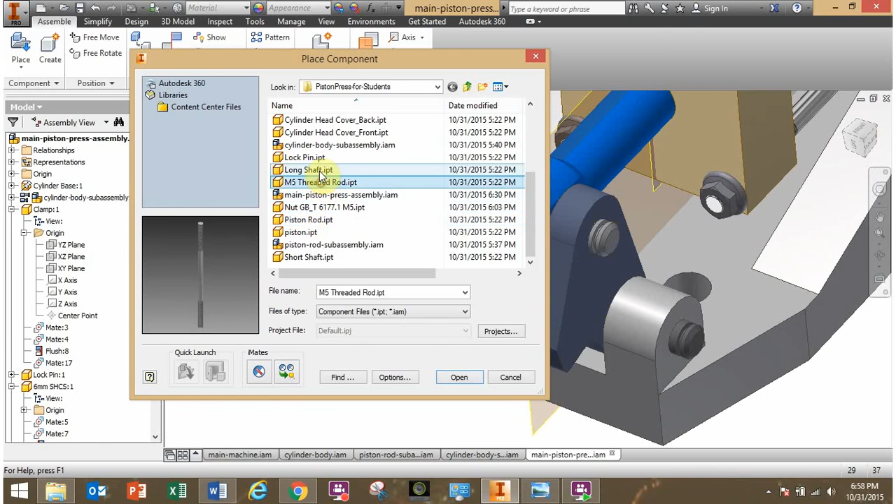So let's go find the snap ring. Click on place. Somewhere around here. Got it. Not there. There's the snap ring. Sorry, the ANSI B27.7 there, that's the snap ring. All right, hit OK.

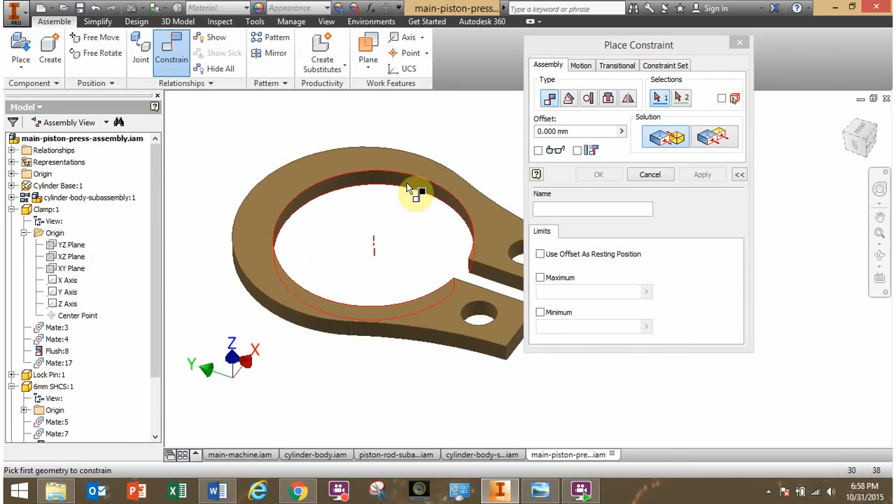Let's place one of them. We'll just constrain one at first. Click on constrain, move that box out of the way. Again, I want this center axis. This time the axis is really small, that's all right, click on that. Let's say I want to place it on this center axis. Hit OK.

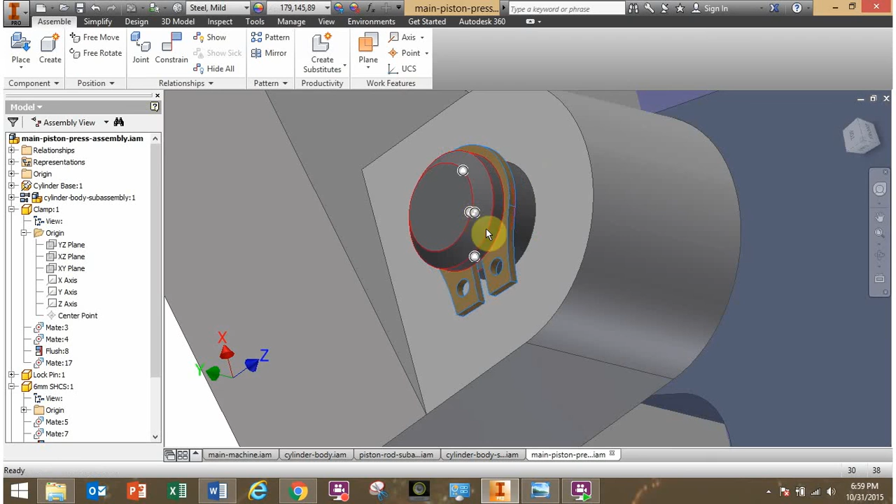So now I can still slide it in and out like this. Alright, now let's constrain, and let's say I want this snap ring, that face to meet up with this face. There it is, hit OK. And now notice I can still rotate it, but now that snap ring would prevent the pin from sliding in or out right there, from sliding too far to the right.

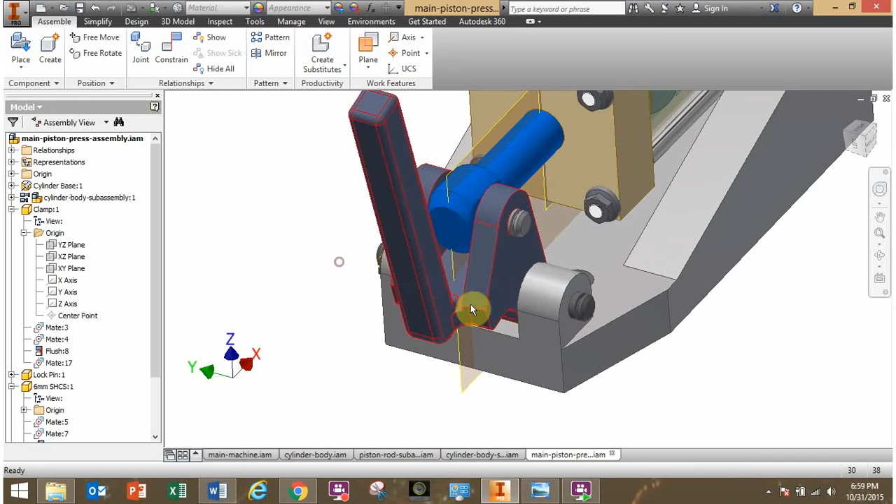And I'd have to go do the same thing for these other 3 slots, this slot, and this last slot here as well. So finish that up on your own, I'll let you do that. And when you've done that, now you've actually finished that lab. Alright.